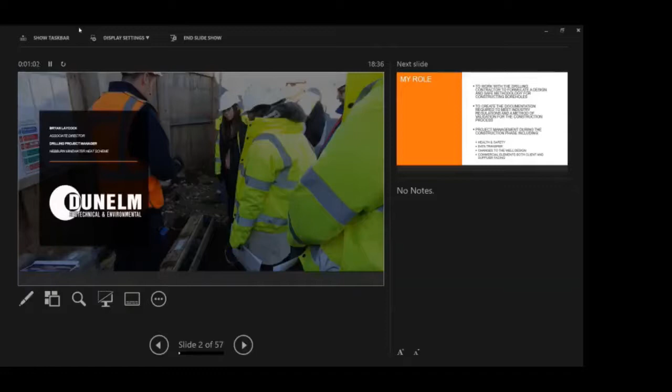A little bit about me. I'm Bryan Laycock, Associate Director at Dunelm Geotechnical. I'm a drilling project manager for the Hebburn Mine Water Heat Scheme. I'm also a project manager for general site investigation works, on small to large scale site investigations, and I look after operations out of the Durham office at Dunelm.

My role in these sorts of works, rather than my general role, is to work with the drilling contractor to formulate a design and safe methodology for constructing the boreholes, to create the documentation required to meet industry regulations, and a method of validation for the construction process of the boreholes. Project management during the construction phase, including all the health and safety, transfer of data to the client's technical team and the client, changes to the well design, and commercial elements, both client facing and supplier facing. So a bit of everything - everything goes through me essentially.

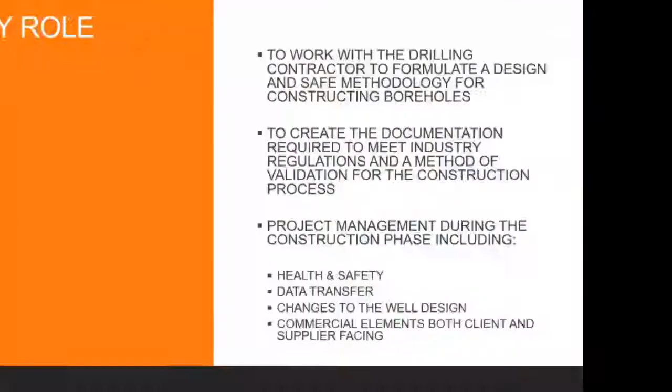Sorry Bryan, just a quick one - we can see your presentation screen rather than... Your screen, yeah, one second, I shall switch my screen. It's an amateur mistake. Is that better? Yes, that's perfect. Sorry, amateur mistake.

Mine water heat schemes that I've been involved with - pardon the spelling mistake - the Louisa Centre at Stanley, which was a pilot hole, and currently the Hebburn Mine Water scheme, which I've mentioned.

I didn't really know what everybody's knowledge of mine water heat schemes would be, or how they're done, how they're drilled for, so I thought I'd give a basic overview and then focus in on the drilling elements.

So what is a mine water heat scheme? It's an abstraction well, a reinjection well, an energy centre, a heat exchanger, and then the energy spread out through a heat network. Generally, the abstraction well is drilled to a deeper coal mine, water is taken up to the surface, put through a heat exchanger, and then put back down through the reinjection well into a higher seam, taking the energy out of it. My expertise is in drilling the wells themselves - I don't do anything to do with the heat exchangers or the networks. My expertise is just drilling the boreholes and planning the boreholes, which are then used further down the line.

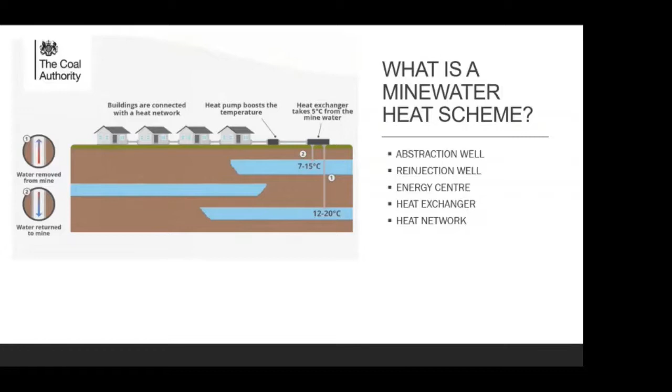Where can it be utilised? Obviously in quite a lot of the UK there's a lot of former coal fields, a lot of which I do investigate in my other role in site investigation, looking at potential collapsed workings for future developments. They're spread across the UK and near a lot of urban environments in the north, which is useful, as the energy is obviously only useful next to urban environments where it can be used. But this does actually give us some challenges, which I'll discuss further down the line.

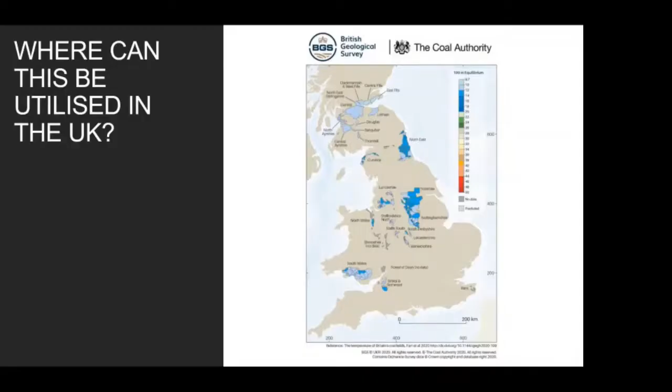My presentation - I'll have a look at what desk study work happens prior to the job even getting to my desk, or us tendering for the work. I'll give a brief overview, because that's not really my expertise, but I know a bit about it. I'll cover what considerations I look at when designing the borehole at tender stage, the documentation required prior to starting the works, safety systems, how we construct the borehole, and the challenges of drilling for mine workings. They have their own particular challenges, which I'll discuss. It's not just like drilling a borehole into an area of rock - you're aiming for discrete targets, so they do have their own challenges.

Before the job ends up on my desk and we've hopefully tendered and won a contract with a client, the client's technical team will have done a lot of desk study work. They've looked at abandonment plans, looked at where the old mine workings are. This is obviously really important - we need to be directly over them. There is a discrete target, so we need to make sure we're over those.

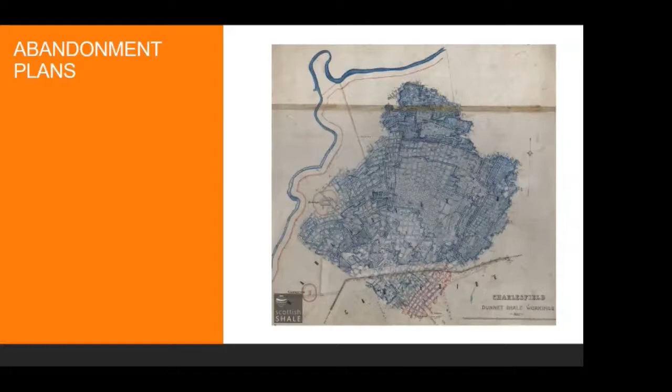So when the mines were in operation, they were surveyed, and these plans are still available. A lot of the time they're beautifully drawn, hand-drafted plans like this. These need to be looked at before the start.

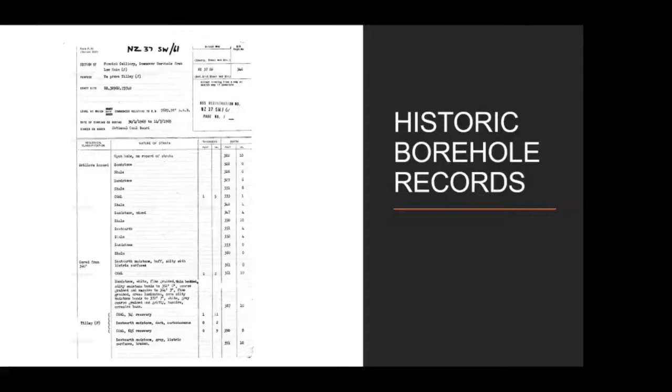Historic borehole records in the area - there's plenty of them on the BGS website. Some are publicly available, some aren't. They go back quite a long time in history, and the further back, the harder they get to interpret, unfortunately. The level of actual detail on them varies as well. This one, for instance, has just got the strata, which is useful, but there's nothing about water, which is obviously important. It might tell you if it's intact in that area or not, and what's being mined, and it also gives you the depths, but there's nothing on water, which would be quite useful.

From this, you can choose your potential well paths. That's important because when aiming for the deeper mine workings, you don't want to come across shallower workings if possible. This creates a lot of difficulties when drilling - it leads to extra conductor casings being used, or potential cement jobs, which can be tricky and not guaranteed to work. So your well path design is quite critical.

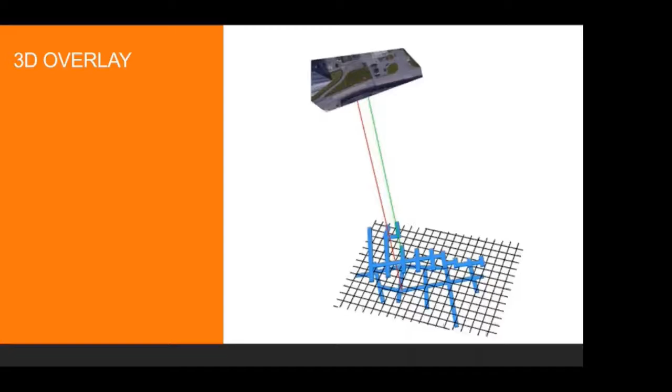Other data sources: geology plans, shaft data, coal authority monitoring wells and pumping data. This can give you water chemistry and temperature locally. Local mine water heat schemes might be a thing in the future - once there's more of these things, will there be knowledge sharing? The temperature and water chemistry is obviously very important to check whether it's viable.

The data is dependent on location - you might be lucky and be close to a really good data set, or you might be unlucky and not have much data in the area and rely on data from quite a distance from your site. This makes planning the job a lot more difficult because a lot of the details of your design aren't set in stone, since you don't have very fine detail to start with. Essentially, once you start the job, you've got to be flexible in your approach to changing the design slightly - depths, etc. - as you go.

Documentation required prior to starting the job - this is very much up in the air at the moment. Different jobs, on a personal level, and from what I gather from other people in the industry, there's a lot of variation currently in what documentation is required before starting one of these jobs from the drilling contractor's point of view at that stage.

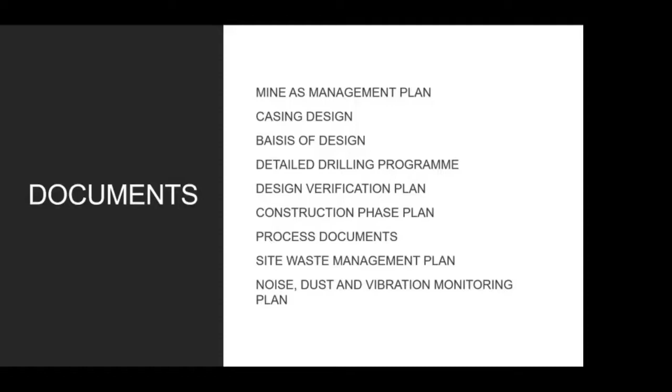So that's important. Casing design, basis of design, and the detailed drilling program are more oil and gas well orientated documentation, which have crept into this sort of work, in the sense that you're drilling into a source that may contain gas, a hydrocarbon. A design verification plan - it's a construction project, so how are we going to verify everything we install? A construction phase plan, obviously. Process documents, which are essentially a risk assessment method statement, site waste management plan, and noise, dust and vibration monitoring plan.

Mine gas management plan - so how do we protect operatives and local residents from mine gas releases or potential mine gas releases? The jobs I've done, one has produced a little bit of mine gas, another one we've had nothing. It's just a potential, but we'll have to plan on the worst case scenario.

What are the potential flows and concentrations of gas? So as you can see, there's an overview of some mine gas, the worst case mine gas we could have had on a site, and the trigger levels and action levels next to them in that table. As you can see, they're well over the action and trigger levels. So you do need to put mitigations and processes in place before you can just drill into these mine workings. How much mitigation is needed is another thing, but you definitely need to take it into consideration. There's no avoiding that fact.

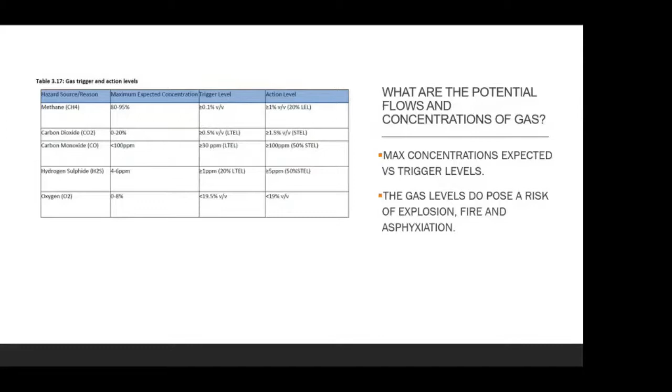Obviously, the gas levels do pose a risk of explosion, fire and asphyxiation, not just to site staff. What are the pathways? So this is an overview of a drilling site, the operations that we're doing, the pathways, and the locations of where the gas would appear.

The job isn't just drilling. There's all sorts of different activities we have to do during the job, including things that have the potential to cause a fire or explosion, such as welding the casing together.

The pathways: release up the borehole column itself, a release of gas through fractures through the rock, through the natural strata, and then into adjacent buildings, and releases of gas from solution, which would happen at the mud tanks when we're drilling.

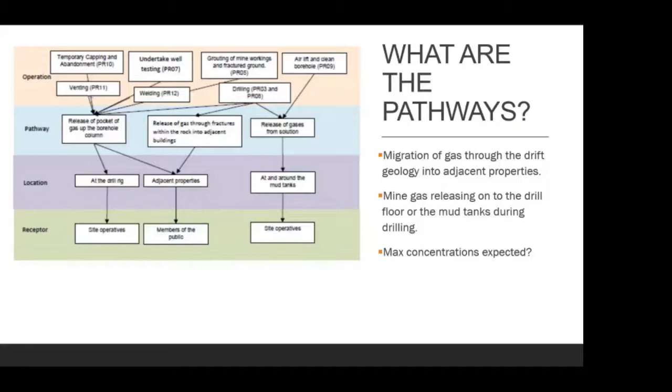The receptors - as I said earlier, the aim of this is to provide energy to urban environments. Therefore, a lot of these sites are going to be in and around other buildings which contain people. If these buildings have basements, they're more susceptible to the mine gas migrating into them through the strata. So you do have to think about how we protect not only the site operatives, but members of the public as well. So how do we do this?

How do we protect the operatives and local residents? How do we monitor the gas? How do we intend to control any gas release? What pressures of gas can the well produce? And is there a safe location to vent the gas on site?

So the first thing that I did when we set off to do this was get a dispersion model produced for the site. I provided them with the concentrations and flow rates that I just showed you, and I gave it to some people who ran a computer model for me with 5 years of weather data. They produced a diagram like this for all the gases - I've just got the one here for CO, but they produced one for all the gases.

And we chose a location on site. We checked that it wouldn't leave the site boundary, and then chose a location on site where to put my vent, which wouldn't leave the site boundary and was away from the nearest receptor. So the blue block in the bottom left hand corner is actually a tower block, so we tried to avoid having it there. And it's also got to be away from equipment which could cause a fire as well.

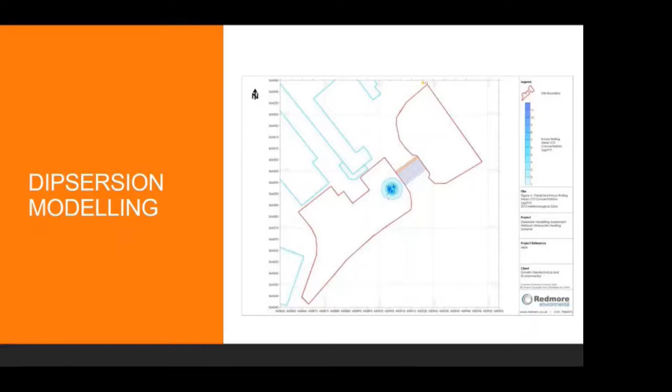Well control - how am I going to control my gases? The primary well control on the jobs I've done is actually the water in the borehole itself. I've always got to maintain a positive head of water in the borehole to suppress the gas. This requires having one well volume of water on site at all times to top up the borehole.

Process and procedures to confirm the well status before the end of shift. So when we switch off the drilling rig at night time, we don't just switch off the rig and walk away. We've got to monitor the borehole to make sure the water level returns to its natural groundwater level. The problem is that if we're using thick drilling muds, it can take quite a long time.

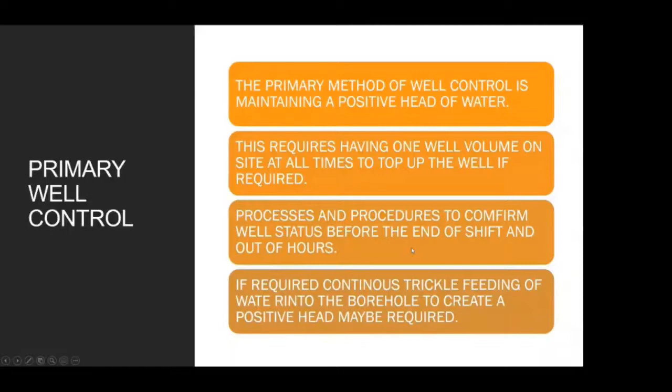So there's a management process with different scenarios. Before we leave site, we'll stick to one of those scenarios and inform the night watch staff what scenario we're under, so they can monitor the borehole at night, and if required, continuously trickle feed water into the borehole to create a positive head. It may be required overnight.

To protect the operatives, we are using a wellhead diverter and venting. That's the diverter there in the blue. It bolts to the top of the conductor casing. The black rubber seal creates a seal around the drilling rods. It's not completely gas tight - it's not meant to be a closed-in system. It does get pressure tested, but it's not designed to completely shut in the well.

That's not really a recommended thing to do. If you start closing in your boreholes, then everything that you put on the borehole has to be pressure tested to the maximum pressure within the borehole.

All we want to do is control where the mine gas goes. So if the mine gas came up at the location of the drilling rig, I want to divert it away as quickly as possible from the drillers and send it somewhere safe. So the mine gas would come up, it would be stopped by the black rubber seal which sits in the top of that diverter, and it would come out the pipe you can see on the left hand side.

That pipe goes to the drilling tanks. There's fewer operatives there, and less equipment which can create a fire. It gives the driller time - if an alarm is sounded at the drilling tanks, it gives them time to switch off and isolate all the equipment on the drill floor before it makes its way to where there's combustion engines and electrical equipment around the rig.

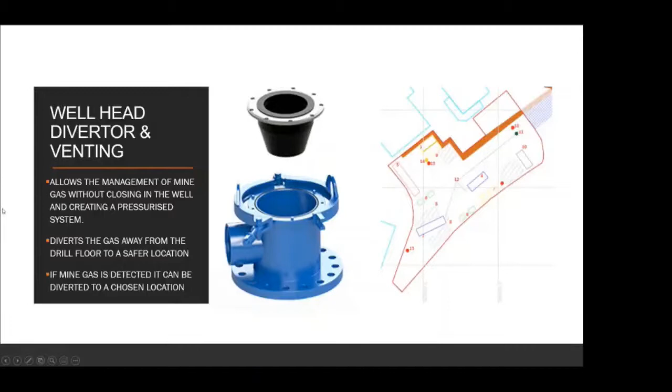With regards to protecting the public, the way we prevent gas migrating to adjacent properties is what we do in site investigation as well. We simply install conductor casing into the rock, but in this sense, because we're going to drill a permanent borehole, we cement it into the ground. This creates a seal.

Any gas, once we've drilled into the rock and cemented it in, we are just drilling through that. Any gas release when we hit a mine will then just come up that column - it can't escape into the other strata and end up in the basement.

Before we put in that conductor casing, we actually put gas monitors in the local buildings in the basement. And in a case of jobs I've done recently, we've actually locked basements and prevented access while we've been drilling. To get access, they've had to come and get our site manager, who then checks the basement with a gas monitor before they go in there.

Obviously, we've got a mine gas management plan. There's a management structure in place, emergency response plans, coordination with the local emergency services on those emergency response plans, and communication with the public.

So on the Hebburn job, we actually do have an audible alarm which the residents can hear. It's about 150 decibels, so they can close their windows. Communication is important - we don't want them panicking, and we want them to know in advance what the procedures are.

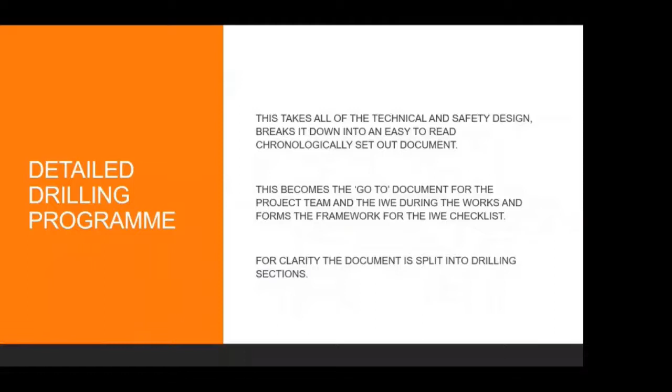For clarity, the document's actually split into what we call drilling sections, so it's generally done off a diameter. So ground level to 20 meters is drilled in whatever, 762 mil. At that point we stop and we'll put casing in. That would be a section, and it would get a section code.

Within each section you have to state what your objective is. So ground level, for instance, for that mine gas one - ground level to 20 meters, drill, install the conductor casing to prevent mine gas migration.

It would set out the potential risks. Now, the potential risks, not for the overall project, but in particular that section of drilling. So when my site manager does his daily briefing in the morning, he knows what section he's in. He knows what potential mine workings we might be going through, so that might be a risk. Or we might just be drilling in a section where it's just sandstone and there isn't any risks. So it's specific to that section of the borehole. Obviously it's different if there's welder and things like that. So that's why we do that.

The bit type and sizes - so what diameter we're drilling, what bit do we intend to use, what bottom hole assembly or string we're intending to use. The mud program - are we using lost circulation materials? What's the mud weight for that section? What verticality and testing programs, or what testing have we got to do in that section? Is it core, and have we got to do some packer permeability tests? It's all in there to that detail.

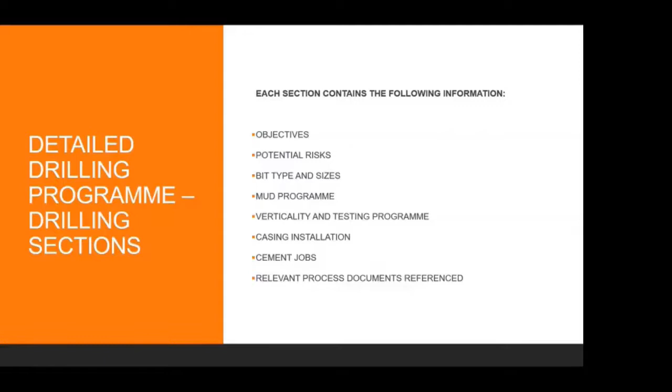Casing installation - what cement job have we got to do on the casing installation, what weight's the cement, what mixture, and then the relevant process documents. So in that section, are we just drilling? Are we open holing? Are we coring? Are we welding? Are we installing casing? Are we doing a pump test? The processes would be stipulated in there, and then our engineer knows what method statements and risk assessments the site staff have got to be briefed on before they start work on that day.

Who will want these documents? So these documents are given to the client, obviously the client's health and safety management team, and client's technical team. The health and safety team want to make sure we're doing the job safely, and the technical team want to know that we're going to get all the data they want in the right order.

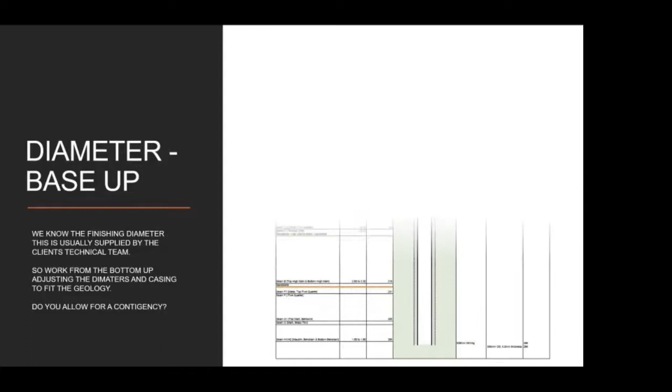However, that's based on the proposed geology from all the desk study work being correct. And like I said, you might not be lucky and have much borehole information nearby - it might just be off the maps, and there might be unrecorded workings, or areas of gross flush loss, for instance, that you might have to case off. So you have to allow for a contingency.

However, if you allow for a contingency, you're making your casing sizes bigger, your drilling sizes bigger, which all costs money. So how far do you go with that? How many contingencies do you allow for? Obviously, that's a commercial, risk-based question, which is going to be project specific.

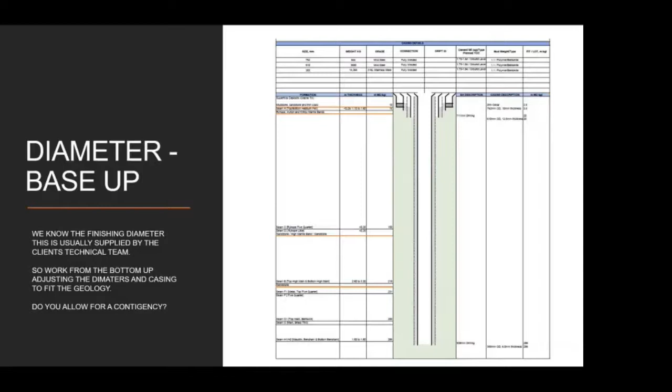That's how we're based. You start from the bottom up and you look for your problems and increase sizes. Casing design,

important. What is your pore pressure profile? That graph, generally they're going to be normally pressurized. So you've got your pore pressure, and then based on your mud weights and your cement weights, you've got your pressures based on that on the same graph.

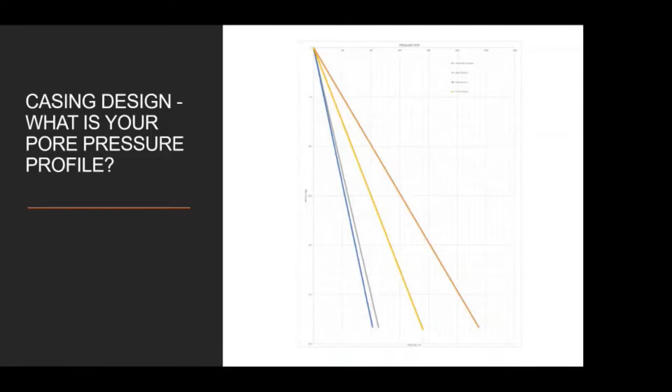Why do we need this? We'll have to look at certain factors, so collapse strengths of the casing, which is why we need that pressure graph. The casing design needs to follow. You have to set out your minimum design factors, which might vary job to job, but generally the factors we'll look at are collapse and tensile strength.

Burst pressure is not a massive issue. The re-injection well, you're very rarely going to have pressure in these boreholes like burst pressure. It's not like you're pumping oil down a pipeline. You may need to force water into a re-injection well, but I can't see the pressures ever really being an issue. But for completeness, we'll look at them.

And then what's your design life, which obviously affects the type of material you use. Assumptions we make: that the casing will never be empty of water, the ground is saturated, there's no formation loads, and we'll apply a factor of safety of 2 generally.

We then look at case load. So what are the worst case scenarios? This is checked against the strength of the casing proposed, and then checked against the maximum collapse and burst pressures. So our casing obviously has to pass.

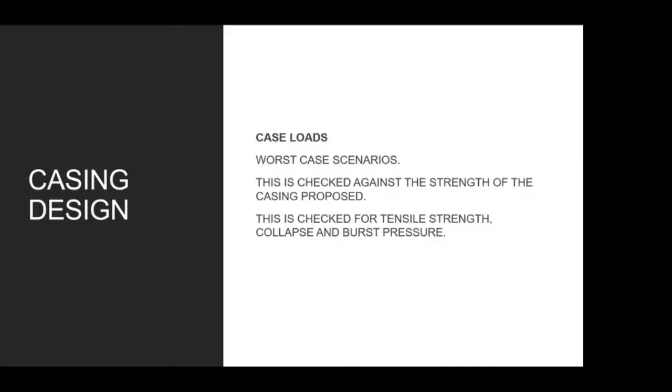So the worst case tensile strength is when the casing's suspended from the crane on installation on the last length essentially. And the worst case for collapse pressure would be that the casing empties of water on the inside when you're installing it, but that's very, very unlikely to happen, which allows you to put in casing which can have less collapse pressure than the pore pressure essentially.

The materials: cement for cementing in the casing, which has to be looked at chemically. Can it be resistant to the mine water? The same with the casing materials. If it's got a design life of 35 years, it's got to be able to withstand attack from the mine water.

What specialist equipment? So I'm currently importing external casing packers from Belgium, which is a bit of an issue at the minute with the customs. Mud design for when we're drilling, and water on site.

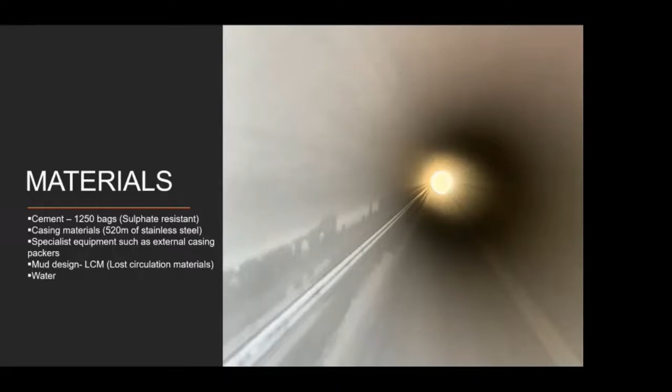There's not many construction materials. As a construction project goes, you've got cement and your casing. There's obviously a lot of work around it, but there's not a great deal of materials. But it doesn't mean it isn't a problem, which I'll come up to.

How do we construct a borehole? I'll quickly go through - I didn't know how much knowledge people would have of drilling, so I thought I'd quickly go through it chronologically. The first thing we do is we survey the location that we've been provided by the client's consultant, hopefully over the top of the mine workings.

We then install a chamber, about 3 meters across, 2.5 meters deep. You can see the first conductor casing set into the base of that. That's where we start. That material obviously has to be disposed of, and that is the starting point for the well. Everything goes into this chamber after that.

That's obviously health and safety wise - I was talking earlier about mine gas, that's now a bit of a potential confined space. So access to that after we've started drilling is heavily monitored, and no one goes in there without a confined spaces permit and harnesses, for instance, to get them out - no one goes in without a way of getting them out, without another person having to go in to get them, essentially.

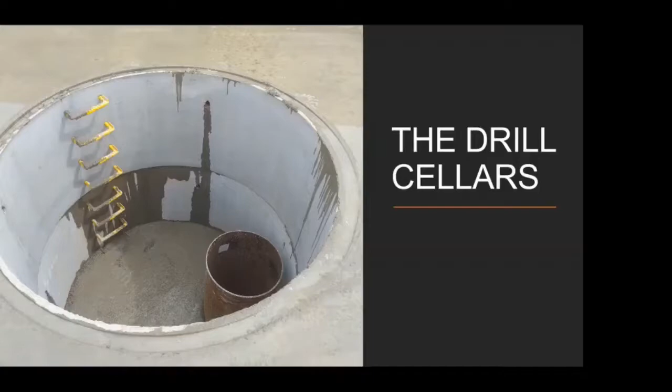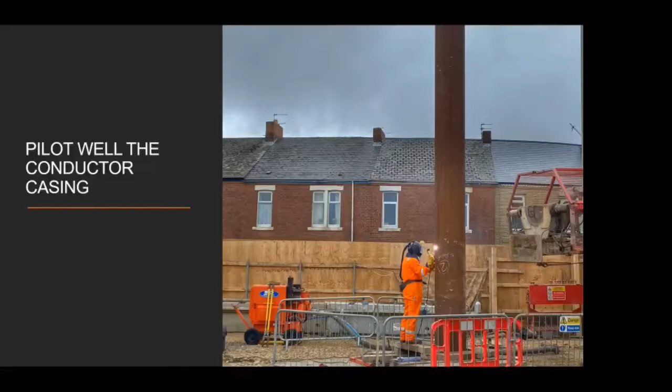The next step is we install the conductor casing. All of the casing's welded, not threaded. That's a commercial decision - it's a lot more expensive to get your casing threaded.

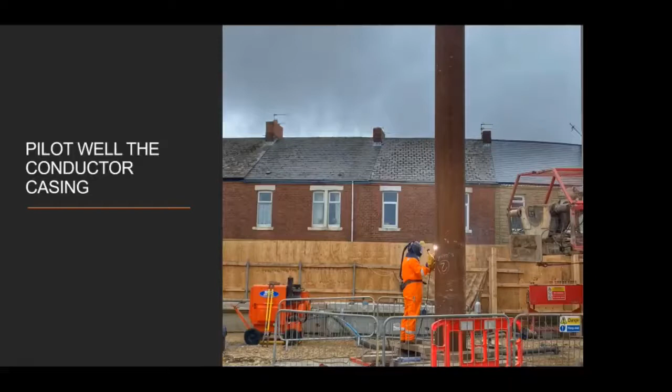Obviously you've got to go through a risk-based commercial decision on that, because you've got to weld over the borehole, which could have mine gas in, so you've got to put all the procedures in place to be able to do it. But the cost of actually threading the casing just outweighs the commercial side for these sorts of jobs, unfortunately. So it's welded in place and then lowered into the borehole before it's cemented in place.

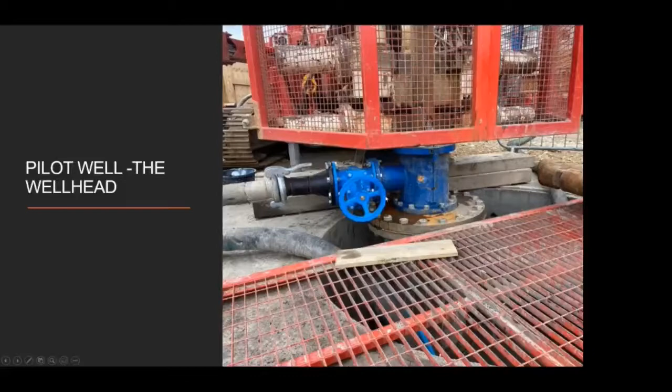The wellhead is then attached to that casing, so you can see the diverter shown in the previous diagrams is bolted onto a flange. At that point, any mine gas has to come up the inside of that. It can't come up on the outside, and it's all pressure tested.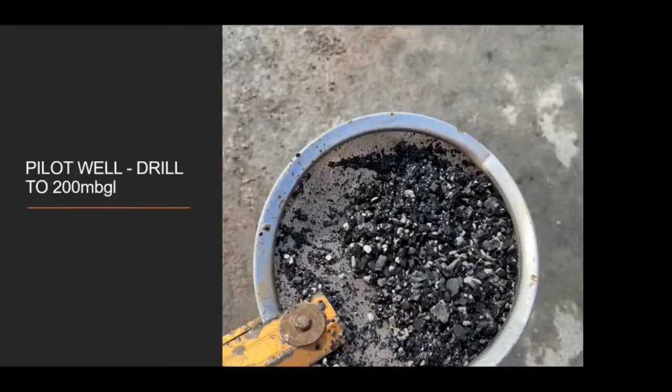Once we've done that, we'll drill the pilot well. In this instance, as an example—it's not always the case, you might start drilling it like it's the final abstraction well or the final reinjection well—but in this hypothetical project, we drill the pilot well to 200 meters, and we'll just open hole drill that. So the only returns we get are chippings, which we'll log as we go, which you can see in the sieve.

Once we get to 200 meters above the target area, at this point we need more fine details, so we start coring. We'll lower conductor casing to the base of the hole, and then lower the coring, Geobore-S coring string, into the hole. We then core across all the targets and get all the information we need to fine tune the design, because we don't know all the fine details. We don't know the exact depths. We don't know how much water there is, what the temperatures are, what the stratas are in between. We don't know until we drill the pilot well.

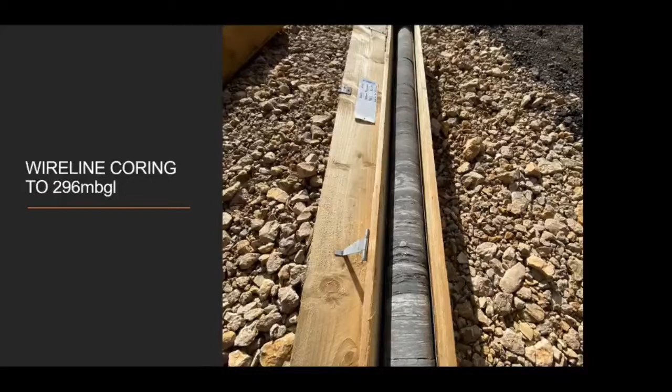So this is the design on the fly, in a sense, as we go. But we drilled in this instance from 200 to 296 meters, and we've got pretty much 100% recovery apart from the coal seams, which was good.

We also then run other tests. So we did a CCTV survey as a potential, take water samples to confirm the water chemistry to make sure all the casing design, materials, spec's all correct. We can do a mini pump test to check how much water there is. Packer permeability testing. We also do verticality surveying as we go down to make sure the well is on the correct path. We do cement bond logs to check that the casing's correctly cemented in, and cement strength tests to check that it's cured correctly.

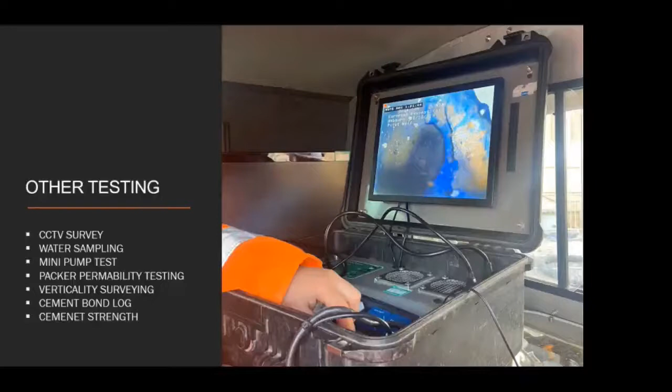We'll also obviously look at water temperature, and we'll also run other geophysics as we go down, so we can check the mud log and fine tune the depths of the strata in the areas that weren't cored. It's handy for picking up coal seams that were drilled through too quick, things like that we didn't pick up. We can pick that out in the geophysics and fine tune the borehole log.

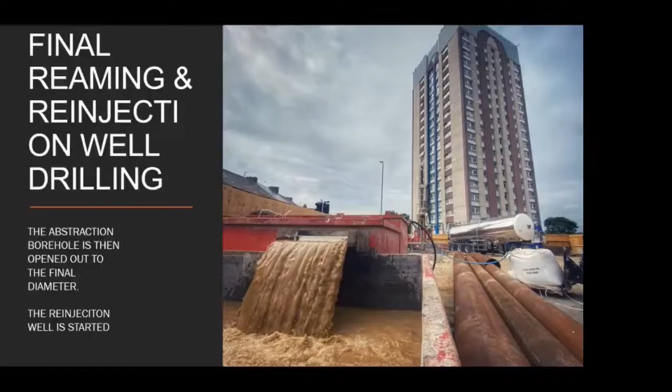Once we've got to that point, we'll start the final reaming, and the reinjection well can start drilling once we know it's a viable project. Once we've drilled it to depth, we'll install the final well casing and the stainless steel casing. We'll then go through a process of well cleaning. As you can see, they're not exactly clean.

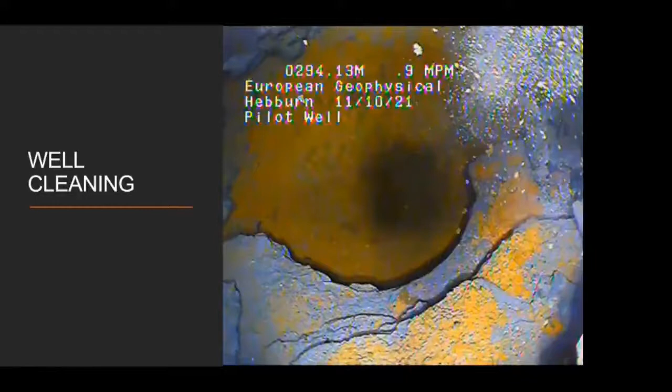You have to get rid of all the fine material that could cause issues for your borehole pumps. So we go through an element of development and cleaning to get rid of all the stuff that could cause issues. And then we do a pump test to check the actual final flow rates.

Challenges: what guidance is to be followed? This is a new area—not new technology, we've been drilling boreholes and geothermal boreholes and water wells for over a century, I guess—but what guidance are we currently working to? There's nothing really for these mine water boreholes. They're not a standard geothermal project where you're just drilling into a rock strata. They're not really a site investigation borehole, although the pilot well is. We're aiming for mine workings which contain gas, so therefore do we take on this more oil and gas well approach where we say we're drilling into a hydrocarbon source?

That then means, do we need an independent well examiner or not? Different projects—there's no guidance out there that says you must have an independent well examiner. It's a client's choice if they do or not. Is there a need for all this detailed casing design, basis of design documents? Is that all needed? We provided it all to the Health and Safety Executive, who then actually had questions and wanted clarifications on it. So is that, in a sense, saying yes, we do need it? Obviously, won't say yes or no—it's all down to ourselves to do what's reasonably practicable.

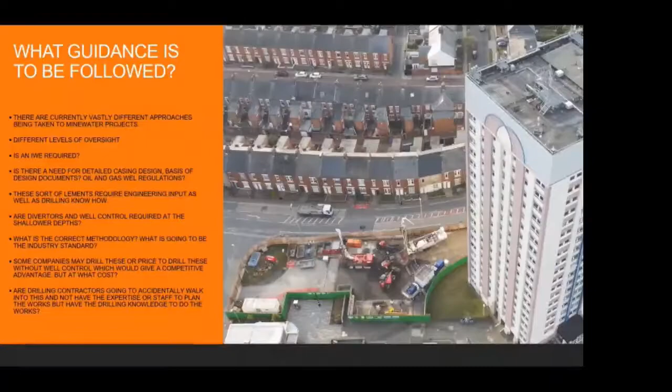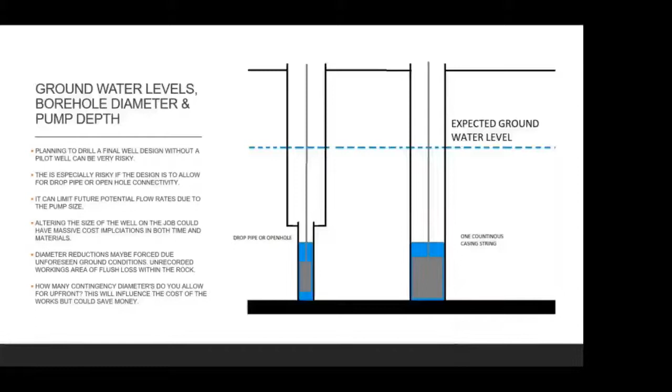But if you set out to do that, you drill it and you're just not doing a pilot well, you just set out to install it like that from the beginning. You've then got a bit of a problem, because you'd have to start again and widen your borehole out, and your casing might be cemented in, your conductor casing. So you've got to do your plan on your worst case scenario. Without an adequate pilot well there, it's quite risky to do the option on the left.

We do noise monitoring. We've got a noise, dust and vibration monitoring plan on site, so we can't exceed certain levels, and it's monitored 24/7 and sends alerts to me and my site manager's phones if we exceed it.

But it's still a nuisance. It's still going to be a noise in the background. It's still going to potentially annoy people and get people's backs up.

You've obviously got all of the deliveries to site. Our site is actually split into a drill side and a compound side, so we're crossing a little road, which is actually an access road to the shops, which we can't block. It seems trivial, but it can add time to a job, just having an awkward setup.

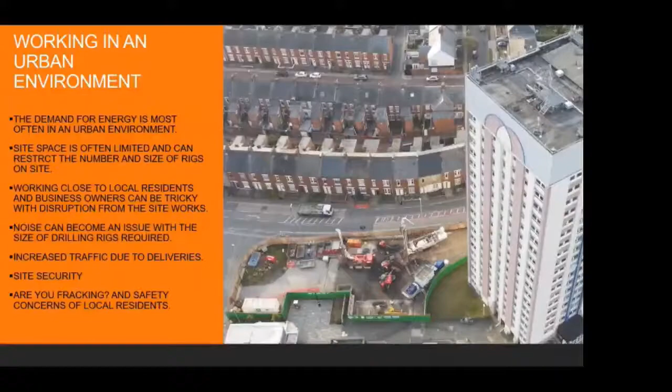Feasibility by pump test is a bit of an issue. A lot of these larger schemes, if it's one building, it might only be 4 litres per second, which is a manageable amount. But say Hebburn, it's tens of litres, 40 or 60 litres per second. If you're pumping water out of a borehole to see how much there is, you've got to put it somewhere. That means, well, where are you going to put it? You can't put it to mine water, they're not going to let you put it in rivers or open bodies of water, and you might not have any anyway. You can't just put it into the drains because that's a lot of water, you might flood the drains. So where does the water go?

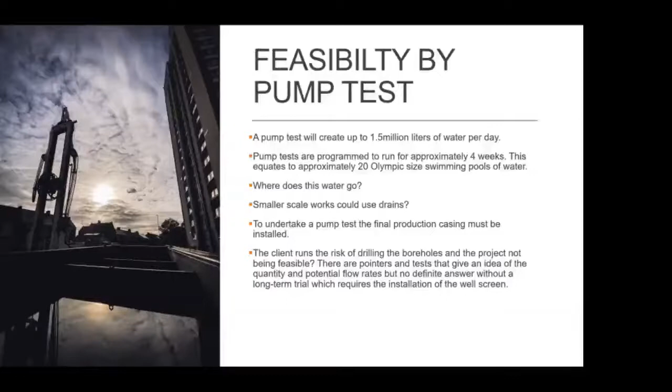Unfortunately, the only real place to put it is to drill a re-injection well. That means your client has to take a risk and sink quite a bit of money into it to drill both wells to then test whether the whole thing's actually going to work. You can do some tests while you're doing the drilling, like mini tests run for a day, but to check whether there's enough water to run for years, you need to run the test for about a month. At 60 litres per second, you're starting to get into millions of litres per day, and you've got to drill a borehole to do it, which means you've got to sink a bit of money, or a lot of money, and get to the point of even installing the borehole before you can check that it's feasible long term. You can check there's water there, you can check it's hot enough, but the long term viability of it can't really be checked until the boreholes have been sunk, unfortunately.

Water supply. Hi, yeah, sorry, just to, I don't know how many slides. I've got about 3 or 4, and then I'm done. All right, okay, no, just think about it. Yeah, I ran over, sorry about that. Yeah, I'll quickly whiz through these ones.

So, water supply in an urban environment, you need millions of litres to drill. I think we're up to about 3 million litres at Hebburn. A water supply from a hydrant isn't enough, they won't give you a 1-inch hose connection a lot of the time. So a lot of the time you need to store quite a lot of water on site, and unfortunately tanker it in, which adds to the nuisance.

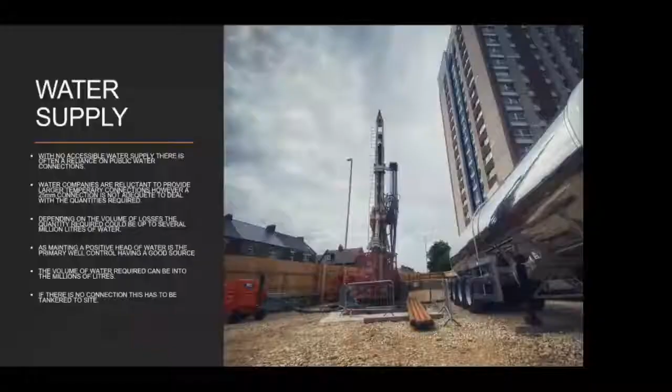Material procurement is an issue. A lot of the materials are from outside the UK now, which obviously means tariffs and getting them into the country. Surge in construction has led to cement shortages, and companies have stopped making specific cement which is sulfate resistant, so I had to put a large order in for that, which is not good. Energy prices affecting steel and cement as well can change the price of the raw materials from tender stage to actually doing the job. So there's a lot of who takes that risk on. The contractor's not wanting to take the risk that the price of steel suddenly shoots up, so that's a risk for the client, unfortunately.